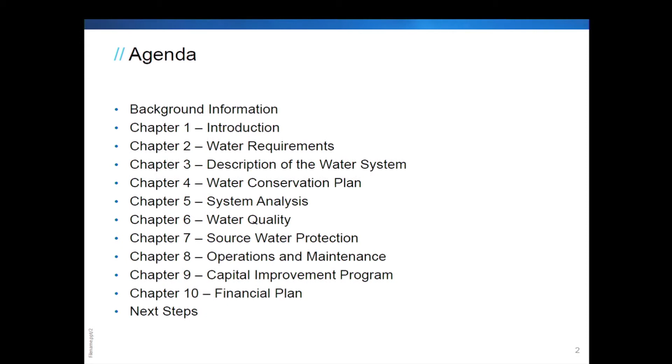Okay, so we have an agenda, and our agenda really is just going to give you an overview of the water system planning process, and then we're going to go through all 10 of these chapters. We're just going to do them really lightly just so you can get a real understanding of what is in this plan for you, and then we're going to end by talking about next steps.

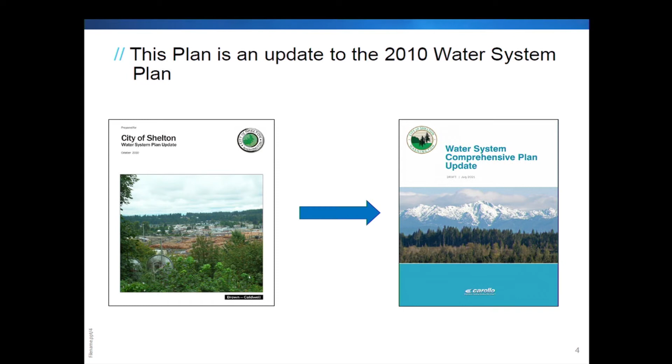So your last plan was done in 2010, really summarized what your system is, and what we wanted to do is bring this forward. And it took a little bit longer than anticipated. COVID probably added a little bit to the process, but now you have a new plan that's going to give you a roadmap for the next 20 years.

So this plan does follow the WAC requirements. Washington State has very specific requirements, what it wants to see in a water system plan. So it defines what your water service area needs to be, what your existing system is, sort of that performance criteria that you're planning to use for your system for all your existing and future customers.

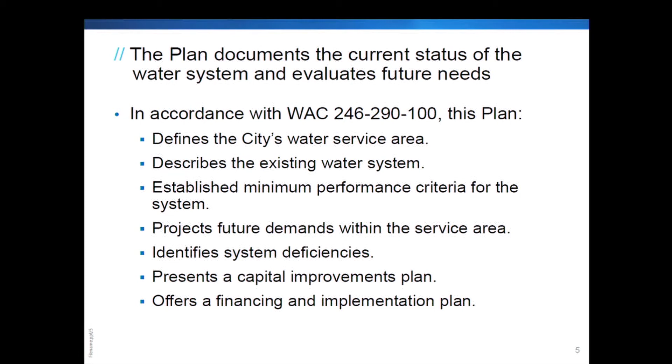We looked at what the future demands need to be to serve this whole area. That's how much water we anticipate for average and max day. We ran it through the hydraulic model and came up with some deficiencies, came up with some recommended improvements, and we'll be summarizing those improvements in a capital improvement plan and talk a little bit about financing and implementation.

All right, so I want to get started telling you about the first chapter. The first chapter is pretty simple, summarizes the purpose, the plan objectives, talks about the areas that you own, also summarizes the approval process. So we're right now at the agency draft plan process.

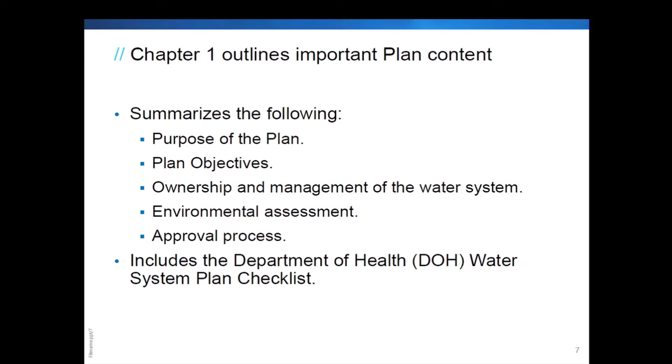So we'll be getting comments back. Those will be tucked in the appendix, and then we'll have the final plan ready for you. And this chapter also includes that Department of Health Washington State checklist that shows that everything has been done according to those regulations. And now Natalie's going to jump in and talk about water requirements.

This tells you about how much water you've developed or you've produced and what you're going to need in the future.

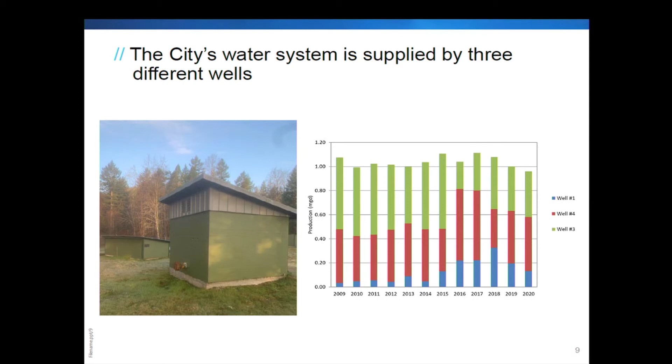So this is a little more detail about the historical average water production. So the blue columns are the average production, which we just saw in the previous graph. And then the red columns are the maximum day demand, which represents the highest production in one day in a given year. And so that's more at the 2 to 2.5 million gallons per day range.

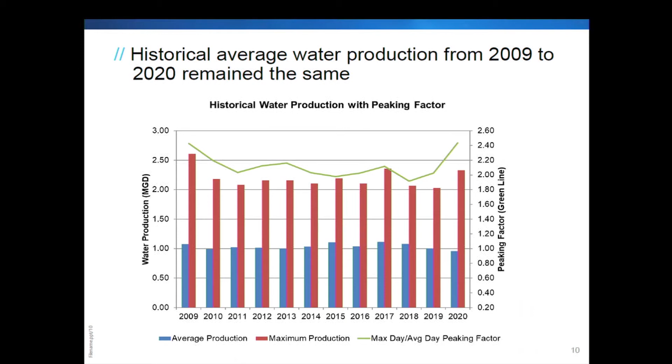And then that green line that you see towards the top is the peaking factor, which is the ratio of the maximum day demand to average day demand, and that's used to help us with our water demand projections.

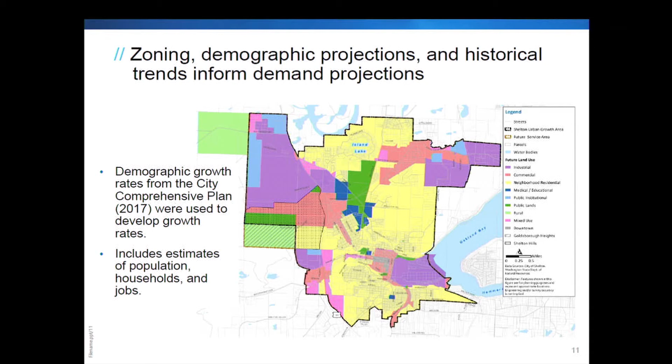So zoning, demographic projections, and historical trends are used to project the future water consumption. So we use the demographic growth rates from the city's comprehensive plan to develop growth rates for the projected increase in water customers within the city's water system.

So the projected water demands are the foundational building blocks for the plan. It helps inform how much water the city may need in the future.

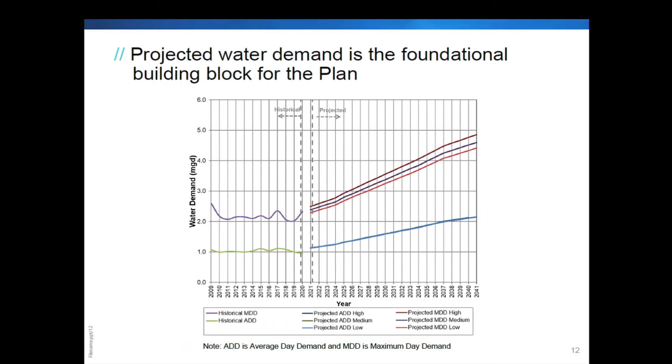So these kind of show the range of what we think the projected demands in the future will be for the city. Can I ask a question? What year does that project out to? Oh, sorry, yes, it goes out to 2041. Thank you. Yes, sorry.

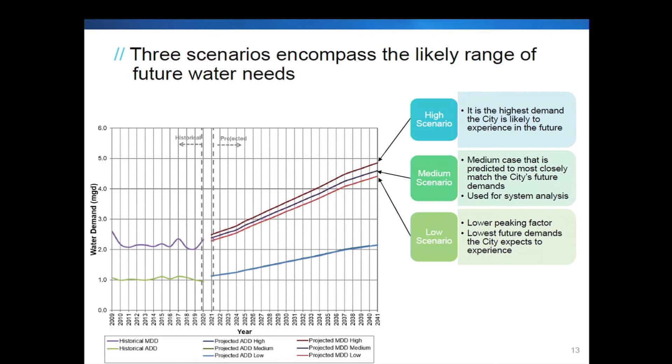And so we created 3 different scenarios that encompass the likely range of future water needs. There's a low scenario that takes into account water use efficiency and conservation and has a lower peaking factor. Then there's a medium scenario, which we think best predicts the city's future demands, and this is the demand projection we use for the system analysis. The high scenario is the highest demand we think the city is likely to see, taking into account a slightly higher peaking factor and no water use conservation. So those are the range of demand projections we developed.

Chapter 3 summarizes your existing water system. The future water service area for the city mostly follows the Shelton urban growth area, shown as the brown dashed line. You can see in the southwest there's the addition of the urban growth area annex, but the rest follows the urban growth area for the city.

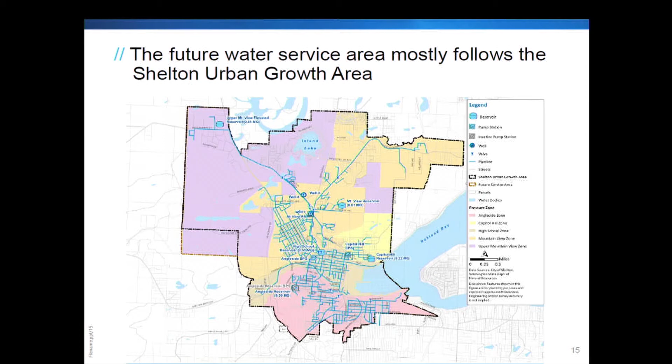The water system is divided into 5 pressure zones to serve water to customers at the appropriate pressure. In the south we have the Angleside zone, shown in pink, and just north of that is the High School zone in brown. Then the Capitol Hill zone off to the east in yellow. There's a Mountain View zone, shown in orange, spreading through the middle and east side, and then the Upper Mountain View zone off to the west, which also includes some high elevations in the city service area.

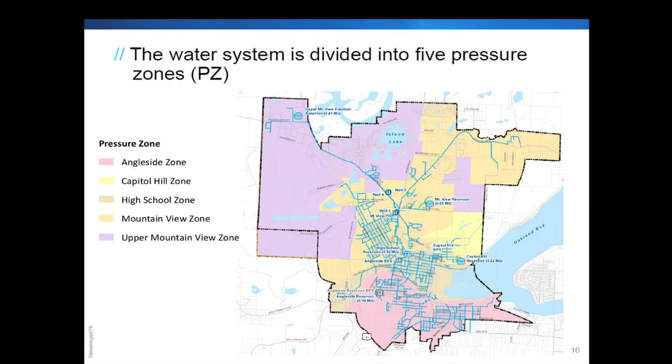This figure shows the facilities that serve the city, including the 3 groundwater wells previously mentioned. There are 5 storage reservoirs, one for each pressure zone, 4 booster pump stations, and over 66 miles of pipe. There's also 1 emergency source, Shelton Springs. Here are some photos: in the top middle is the Upper Mountain View reservoir, and on the right is the Mountain View reservoir, a picture of the well, and one of the pump stations.

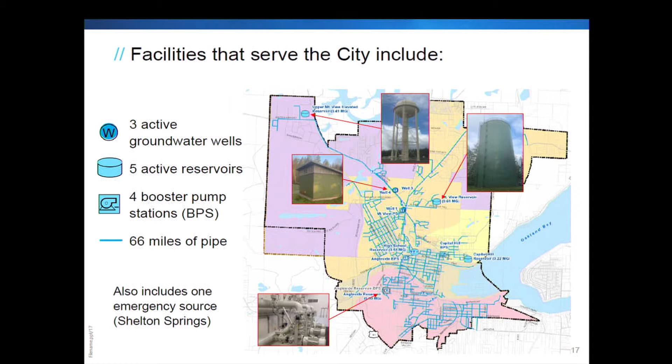We developed a hydraulic profile to show how the system functions together, a way of seeing how it's all interconnected. You can see the pressure zones here as larger rectangles, and the 5 reservoirs that serve each pressure zone. The 4 pump stations are there, the 3 wells are there, and valves connecting between the different pressure zones. It's just a different way of visualizing the system to see how it all works together.

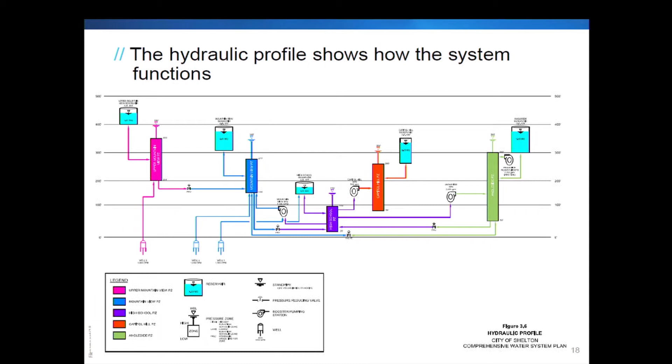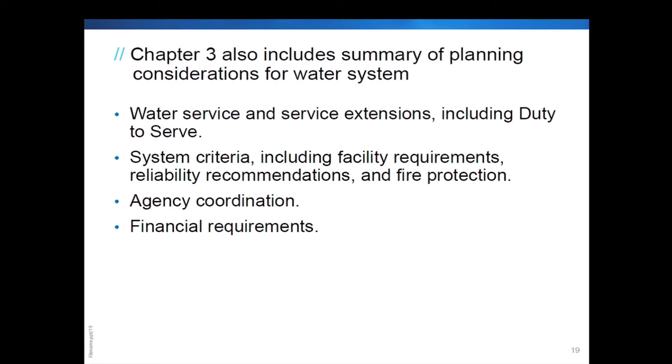The chapter also includes a summary of the planning considerations used to develop the plan. It includes the water service and service extension policies, including the duty to serve. It also includes system criteria, which we used for the system analysis, and summarizes the agency coordination and financial requirements for the city.

Chapter 4 presents the water conservation plan and the water use efficiency program. DOH requires that all Class A municipal water systems develop a water use efficiency program to plan for conservation. The program should include key parts: collecting data, forecasting demands, evaluating water use efficiency measures, calculating distribution system leakage, and implementing a water use efficiency program to meet goals.

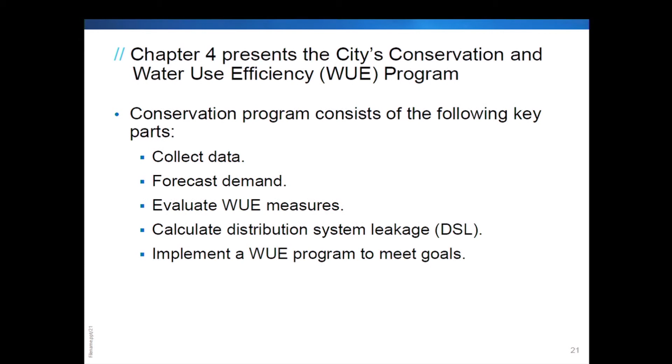The city has adopted 3 water use efficiency goals: to reduce total consumption, maintain low distribution system leakage, and reduce residential water consumption.

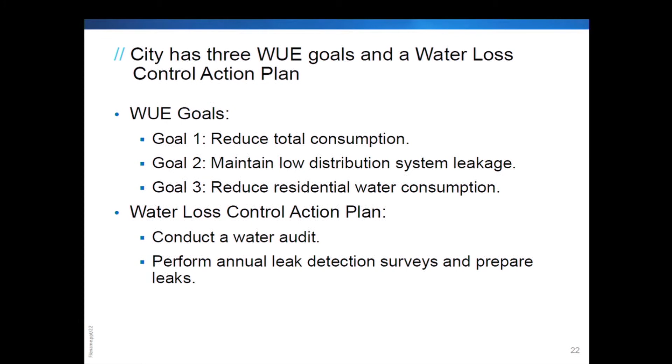The water use efficiency rule also requires that utilities with distribution system leakage greater than 10% develop a water loss control action plan. The city has a water loss control action plan, which includes 2 main activities: conducting a water audit, and performing annual leak detection surveys and repairing leaks. That makes up the city's water loss control action plan.

The water use efficiency program represents the lowest demand scenario previously mentioned, which takes into consideration decreases in water demand per customer and a lower peaking factor, tying back in with the demand projections we were just discussing.

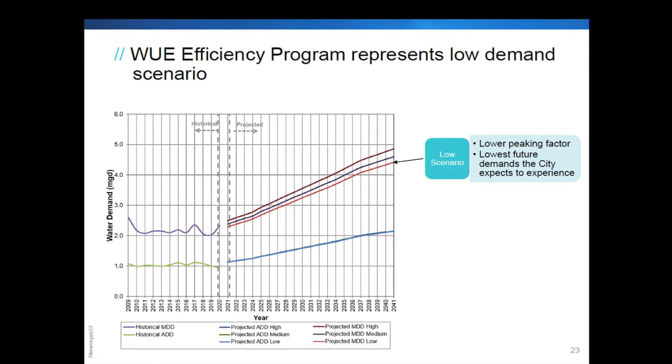Okay, so Chapter 5 summarizes the system analysis. This is the bulk of the plan. We looked at the whole system and identified deficiencies, and then recommend improvements based on those deficiencies.

So we looked at the city's existing water system with future conditions under 2031 and 2041 water demand projections. We used the planning demand projection to evaluate the city's pumping and supply capacity and the storage facility capacities. We also used the hydraulic model to review the system pressures and velocities, and also looked at the fire flow capacity.

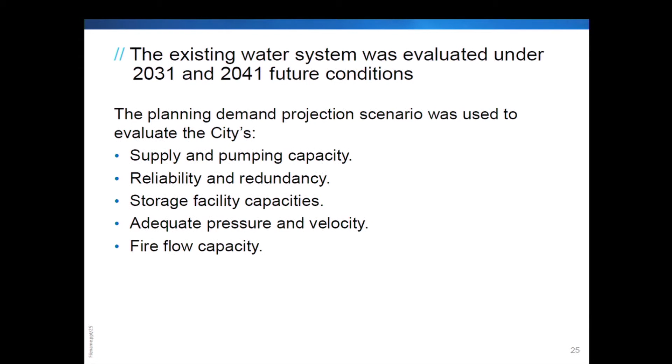So the first thing we did was we looked at the supply and pumping capacity. We compared the capacity of the wells and the pump stations to the projected demands. One element we reviewed, which this figure shows, is the supply redundancy, which looks at the system with the largest source out of service. So we looked at the capacity of the system with Well 1, which is your largest source, out of service.

And with that, we saw that there was a need for some supply redundancy. So we are recommending a new well to provide some redundancy to the system, and also a new Upper Mountain View booster pump station to provide redundancy to the Upper Mountain View pressure zone.

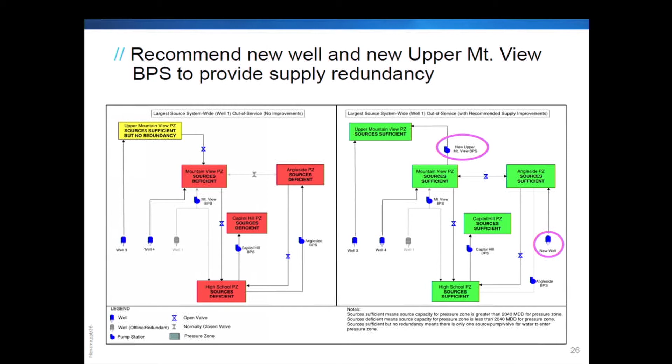So next we looked at storage capacity. We compared the existing storage capacities to the storage requirements. There's more details about that in the plan, but this is kind of a summary of that. You can see at the bottom of the table there is a deficit in the future for the storage capacities, and so we recommended a couple projects for meeting that deficit.

The first one is based on when Shelton Hills gets developed, there'll need to be a new elevated reservoir in the Upper Mountain View area to serve that development. Also, 2 new storage reservoirs are recommended: one in the Mountain View pressure zone near Well 1, and then another one in the Angleside pressure zone to meet the storage deficit.

Also recommend in the future taking the Capitol Hill Reservoir offline so that customers in that pressure zone can be served at a higher pressure. Just the elevations of the customers in that area and the height of the tank don't really match up, so in the future we're recommending taking that reservoir offline.

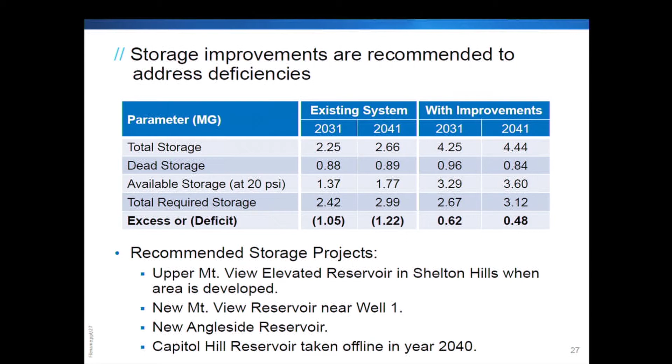So next thing we did was we used the updated and calibrated hydraulic model of the city's water distribution system and looked at pressures, velocities, and fire flow requirements.

So this figure shows high pressures in the system. There's some in the Angleside pressure zone and the high school pressure zone, but we don't have any recommendations to address those high pressures because they're not excessive. Most of them are between 80 and 110 pounds per square inch, but this figure just identifies those areas.

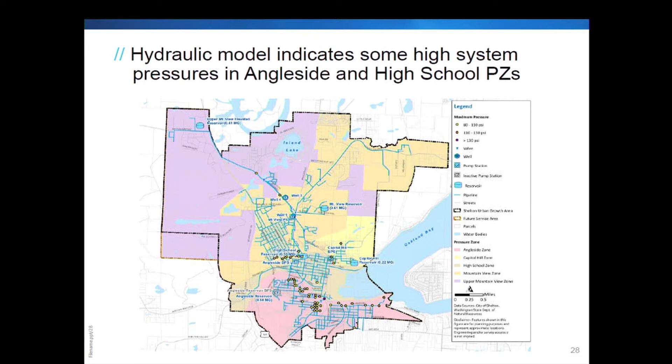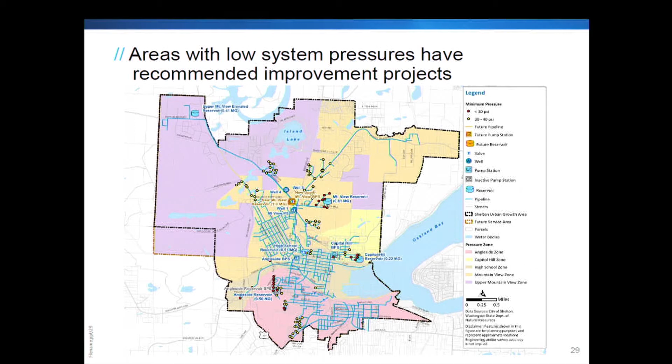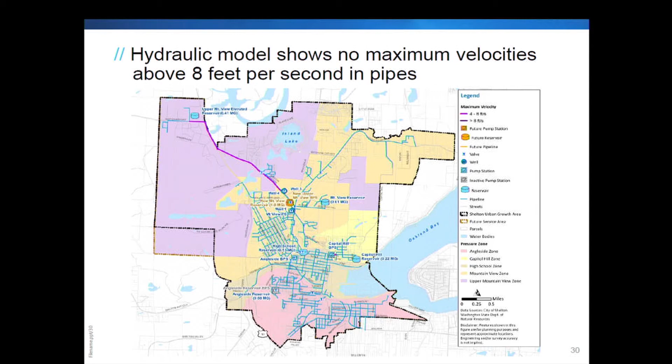And then we also used the hydraulic model to look at velocities in the pipes. The hydraulic model showed that there's no maximum velocities above the 8 feet per second criteria, so we don't have any recommendations based on high velocities.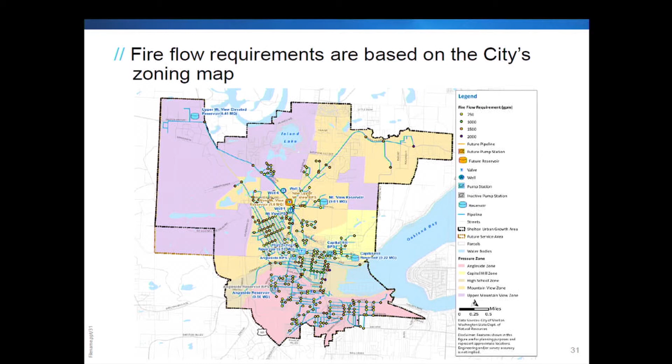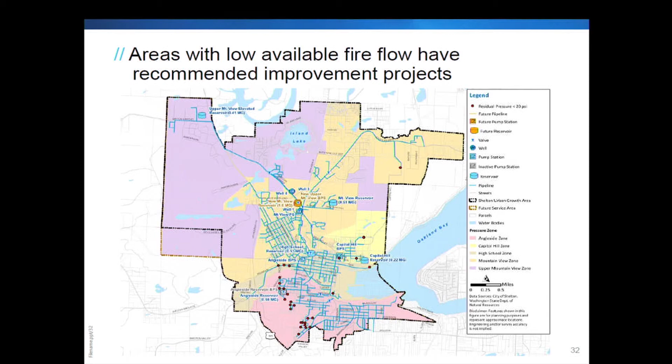The final thing we looked at using the hydraulic model is fire flow availability. This figure shows fire flow requirements, which are based on the city's zoning map. Fire flow requirements range from 750 gallons per minute up to 2,000 gallons per minute, depending on land use. We used those requirements to see if there's enough available fire flow within the model, and we developed recommendations where there was low residual pressure under fire flow conditions, which are noted by those red dots in the figure.

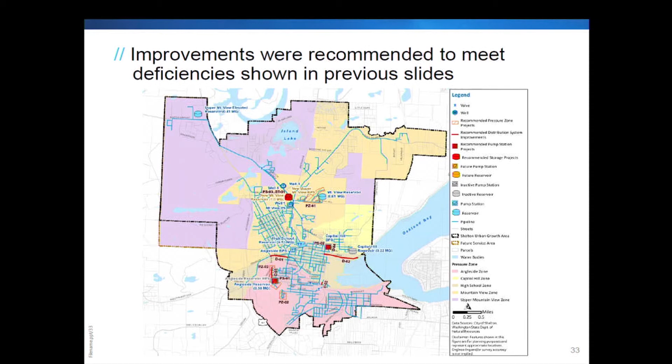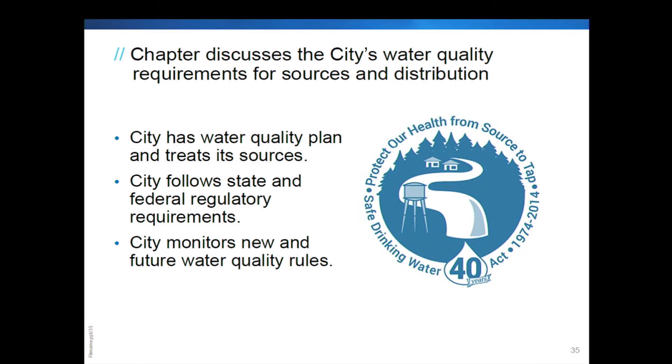Chapter 6 describes the water quality requirements for the sources and distribution system. As a Group A water system, the city must comply with the drinking water standards of the Federal Safe Drinking Water Act and Department of Health standards. The city's water quality is in compliance with all regulations for water quality and reporting requirements. The city has a water quality plan, treats its sources, follows state and federal requirements, and monitors new and future water quality rules.

The Consumer Confidence Report rule requires that community water systems provide annual reports to their customers with information about the quality of their drinking water supply. The city complies with this rule through its annual water quality and efficiency report, which is shown here, and those get released to consumers annually.

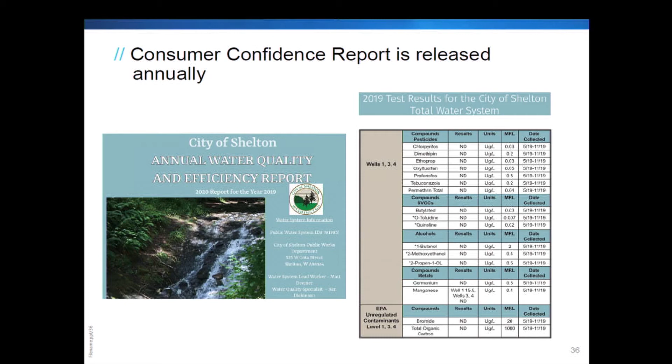Okay, the next section is Chapter 7, which is the water source protection.

The city's wellhead protection program plan was updated as part of the plan. Washington state regulations require water systems to maintain a sanitary control area fact sheet for the drinking water sources to protect them from contamination, and also require that cities develop and implement a source water protection program. Since the city's sources are groundwater wells, this means the wellhead protection program is required.

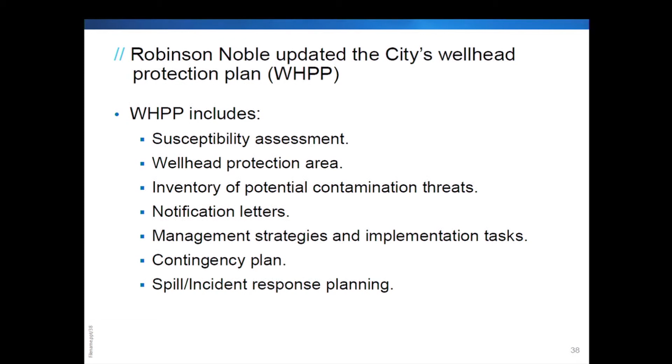This wellhead protection program includes the items listed there. I won't read them out, but those are requirements that are included.

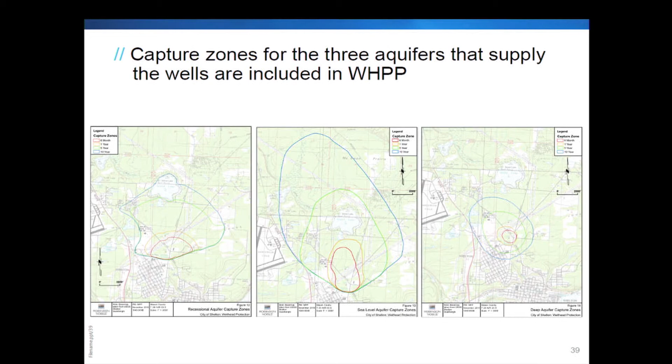One thing that is required is capture zones for the aquifers. These figures show that the wells draw from 3 different aquifers within the area, and the figures show the 6-month, 1-year, 5-year, and 10-year capture zones for each aquifer. Those are included in the wellhead protection plan.

The next chapter is operations and maintenance, which summarizes the operation and maintenance of the city's water distribution system. That chapter includes a public works organizational chart that was recently updated, showing how the water system department and public works interact, who is involved, and what their responsibilities are.

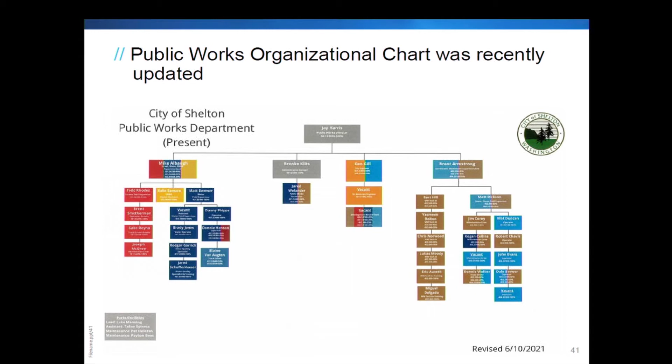The chapter in the plan summarizes all of the operations and maintenance efforts, which are a lot to keep the system running and maintained. This includes who manages it and the personnel involved, what operator training is required, and who's certified to run the system. It also summarizes procedures and maintenance for different equipment and systems.

It also has things like the emergency response program, the cross-connection control program, and customer complaint response program. These are all important programs included in this chapter and in the appendices, which is why sometimes the reports get long with those appendices, but those are all included there. It also keeps track of safety procedures and record keeping and reporting. So all that good stuff is documented in the O&M chapter of the water system plan.

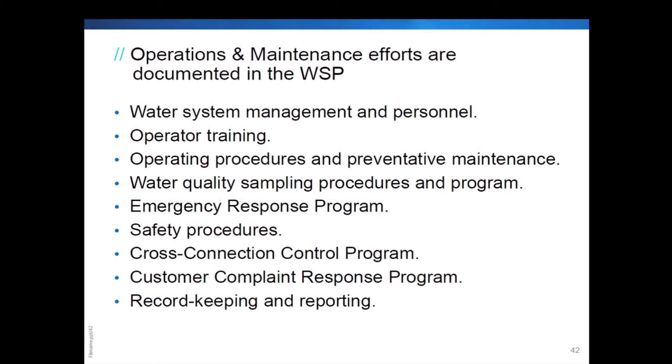Chapter 9 is the capital improvement program. This chapter summarizes the recommended capital improvement program. The CIP helps the city prioritize and execute projects. This figure shows another summary of all the projects with specific locations that are recommended from the system analysis and other chapters within the plan.

It's hard to see up there, but it shows all the projects that we would recommend by what type of infrastructure is involved.

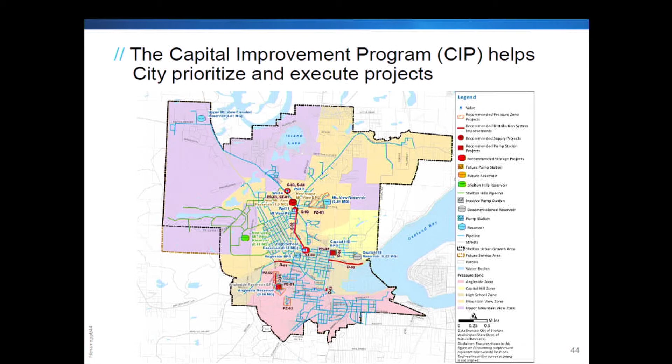The CIP projects are identified by the type of infrastructure. We have general projects, supply projects related to wells and pressure zones, storage and pump station projects, and distribution system projects, which are pipeline projects. This helps identify the projects based on what type of infrastructure is involved, and you'll see in the plan that they're identified by these categories.

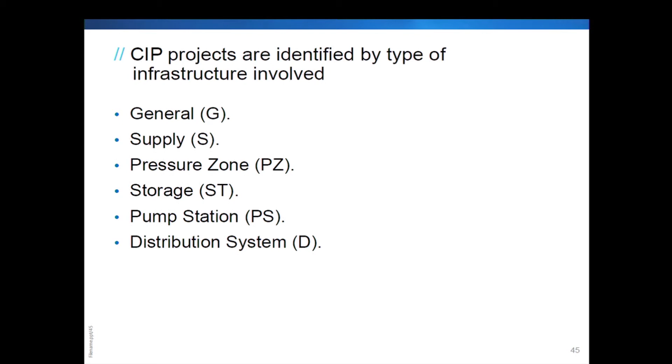We also allocate the capital projects into 3 types. The first is growth, where we look at projects that provide additional system capacity to meet future demands, typically funded by connection fees and developers. We have those separated from repair and replacement projects, which are repairing or maintaining existing infrastructure, funded mostly by rates.

Those are also differentiated from level of service projects, which increase the level of service for the city's system, including things like redundant pumping, backup power, and fire flow availability, and those are typically funded by rates.

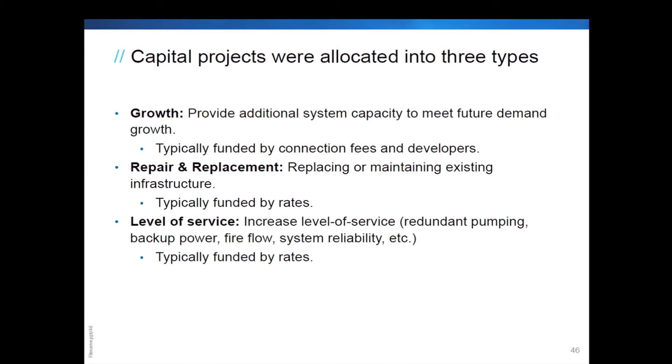The CIP includes a summary of the project costs and the recommended year for implementation. The expanded table is on page 9-5 in the plan. I don't expect you to read this from the slide, but it summarizes all the recommended projects from the water system plan and what year we recommend, what percentage of each project type they are, and what the total cost would be.

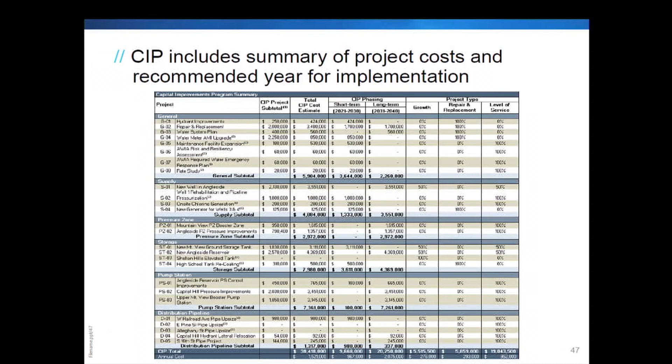Looking at the CIP by project type and whether we allocated them to the short-term or long-term can help guide funding decisions. This table summarizes the CIP costs by project type and whether it's a short-term or long-term project, with a total cost and also an annual cost based on the number of years in each term.

And then we also look at the CIP by infrastructure that shows where funding could be allocated. The CIP costs are split by categories, with storage and pump station projects making up the largest portion.

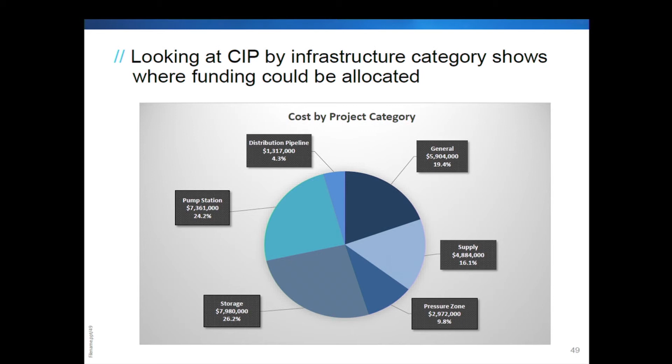And now I'm going to hand it to Laura. Thanks, Natalie. You guys did a great job listening to those long chapters, but we felt it was really important to give you this foundation. Department of Health does require a financial plan. This is a brief chapter that summarizes the financial status of your water utility and how you would fund the CIP that we just showed on the previous slide.

So it summarizes your historical past performance, like what are your rates, what are your charges, do you have any outstanding debt for the water system? It talks about any financial policies you have, what the forecast would look like moving forward if you were going to implement these projects, and does a summary and recommendations. It's a high overview, just so Department of Health can say yes, this is a viable utility.

But what I do want to tell you about this financial plan is that it includes the $2 million for the rehabilitation well that's necessary, and it shows the state funds and revenue. So this is really great for your water utility to have available.

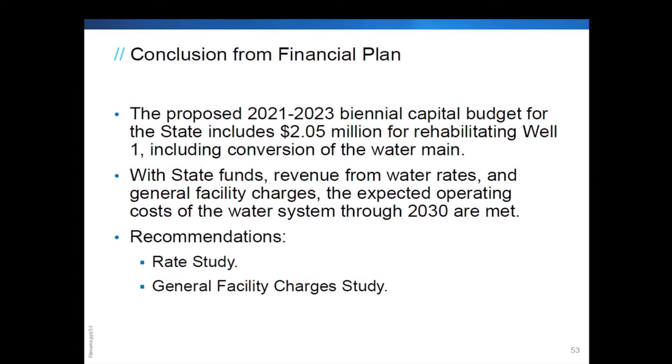So I just wanted to remind you that these are really important, and we did include both of these in our CIP and recommendations in our plan for you.

So we have a draft agency review plan. You've taken a look at it. It's ready to go forward to the surrounding communities, the county, and Department of Health. We will get comments back from all of them. It usually takes somewhere between 30 and 90 days. We'll review all the comments, work with city staff and the city team to put all the comment responses together, incorporate them, and then bring back to you a final plan for approval.

So I really appreciate your guys' time and attention, and hopefully that was a great overview of your system and what the next 10 and 20 years will look like. Thank you very much. Any questions for them right now?

Joe? Yeah, very thorough presentation, thank you for that. Did have a couple of questions, and I'm not sure if this is maybe a Ken or Jeff question, so bear with me here. We're using the term equivalent residential unit, and then on the stormwater side, we're using equivalent service unit. Is there a reason for the difference? And if so, can you explain what that is?

Those two terms, as we use them, are used interchangeably. I think now that I think about it, we probably ought to use the same terms for all plans, just for clarity's sake. But I think that's something easy to correct.